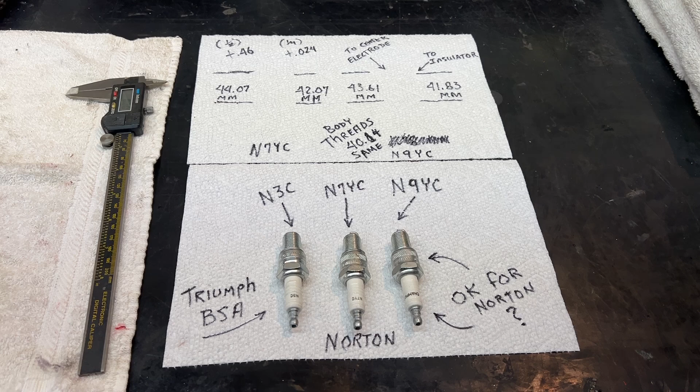Oh, let's have some fun with Frank.

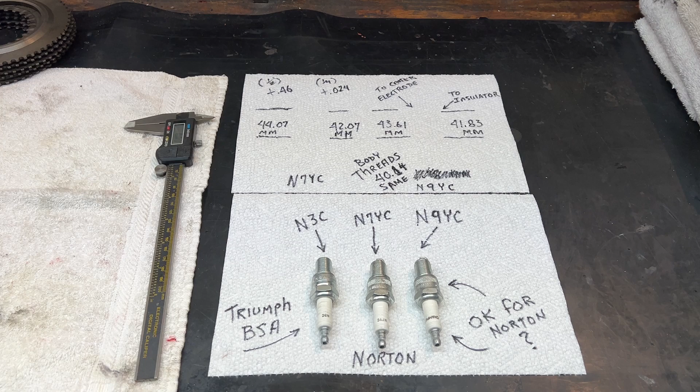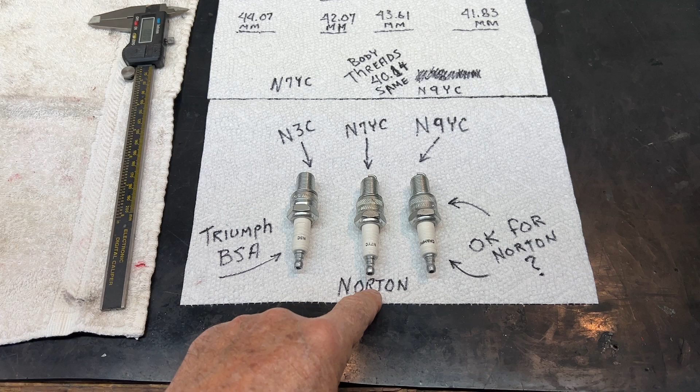I recently replenished my supply of spark plugs. Found a site online that had 16 available N3Cs, which I use for Triumphs and BSAs. And I bought 16 N7YCs, which I use for Nortons. But they supplied 16 N9YCs. I'm going to contact them and say, was this a mistake or was this your closest substitute, and then see what they say, whether I should return them or buy these.

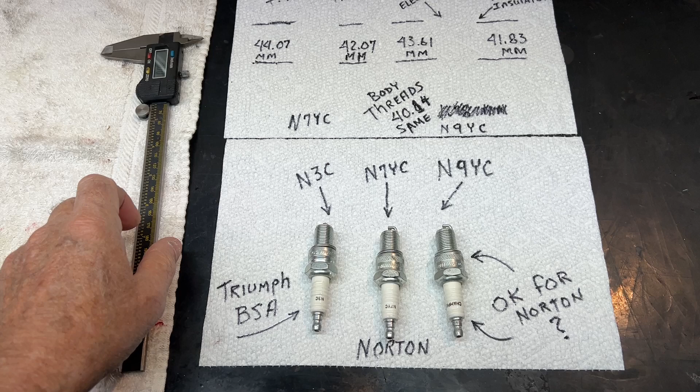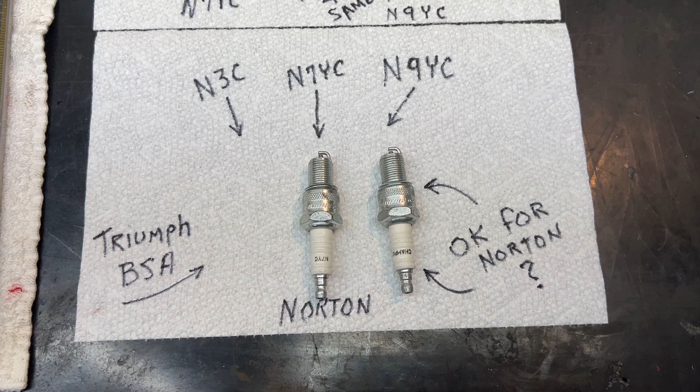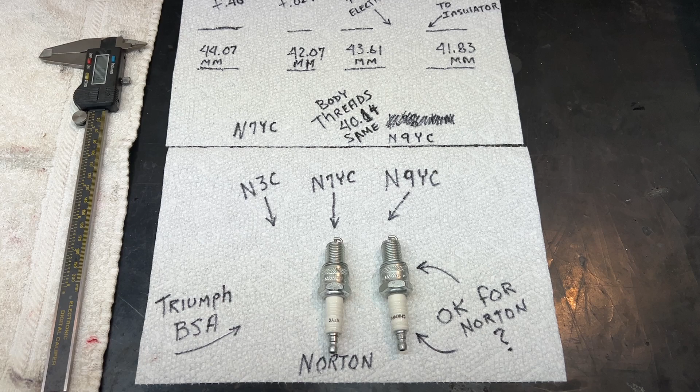In the meantime, I just wanted to see the difference between the 7YC and the 9YC. I'm going to take this out of the equation, we're not going to fool with that. But when you take these two and ask, can I use a 9YC in a Norton, or should I stay with the N7YC Norton? The truth is, everybody watching this video is going to say you should stay with the N7YC because that's what it calls for. True, I agree, 100%.

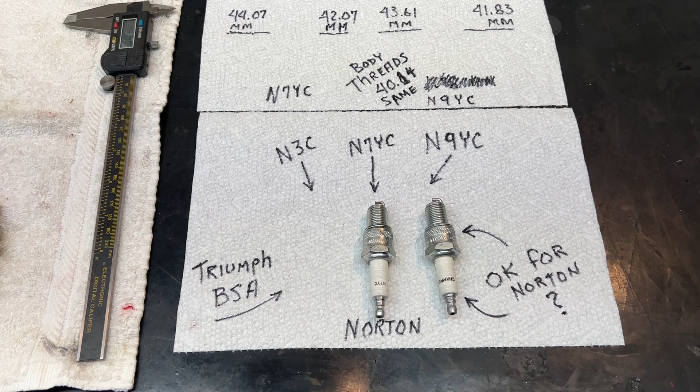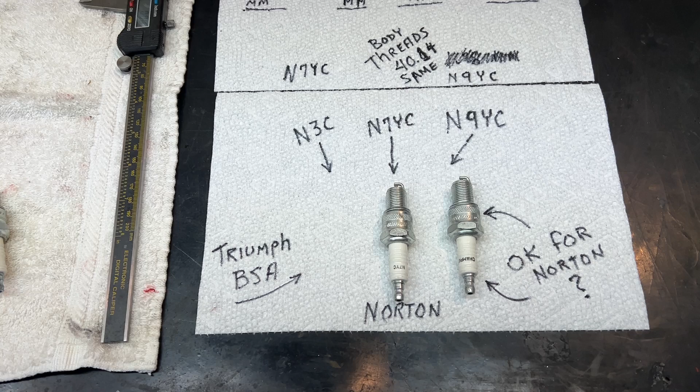I have also, in a pinch, run my Norton on an N3C and never seen any difference. I rode it pretty hard when I rode it. So I think you can safely sub in an N9YC. I'll bet you $1 it's not going to make a hair's breadth bit of difference. But once again, we're talking opinions, and opinions are interesting.

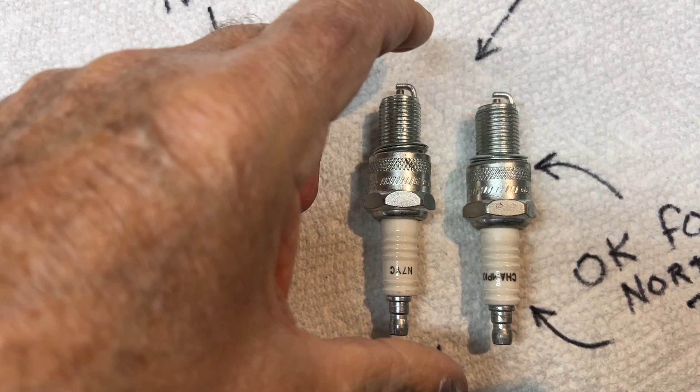So here, let's go in here for a close-up of these two spark plugs side by side, and you'll see that the 7 sticks into the chamber a little farther than the 9 — a little bit farther on the insulator, a little bit farther on the electrode, center electrode. Now, by the way, the bodies are the same. Any differences you see is parallax. I measured the bodies, they're the same. So the difference is in the insulator and the center electrode.

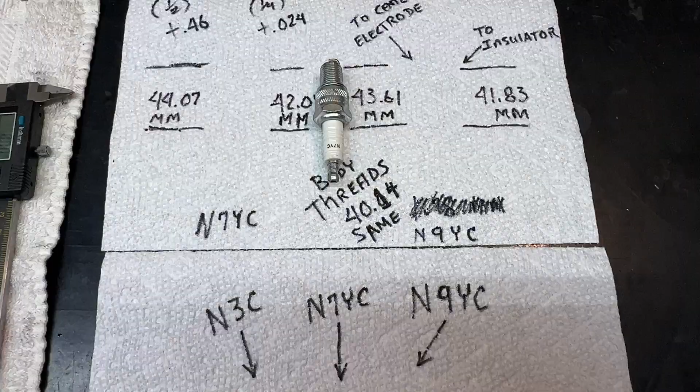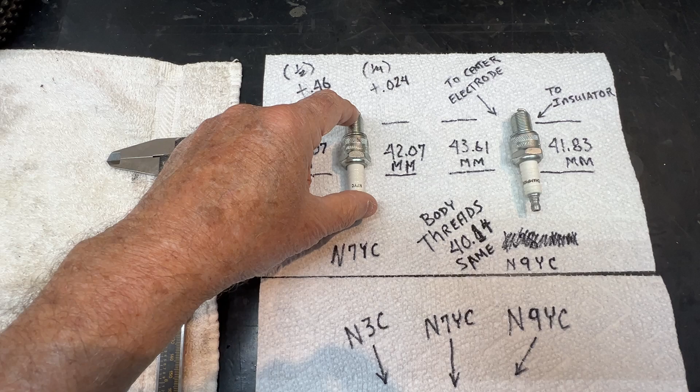Now let's just take this guy and put him up here. I'll zoom out a little. Out, Frank, out. And I'll take this guy and put him up here. These are some measurements I took. I was measuring from the bottom of the metal body to the center electrode and the insulator.

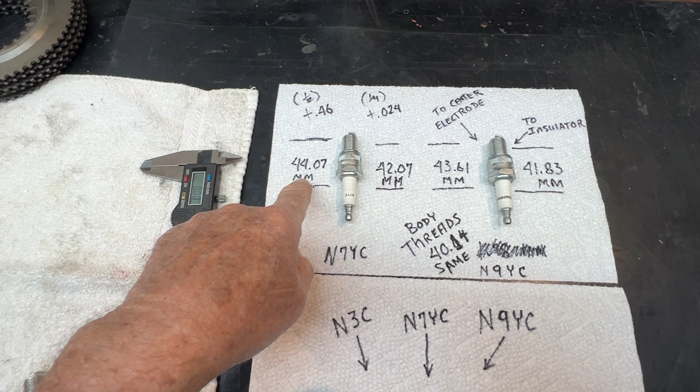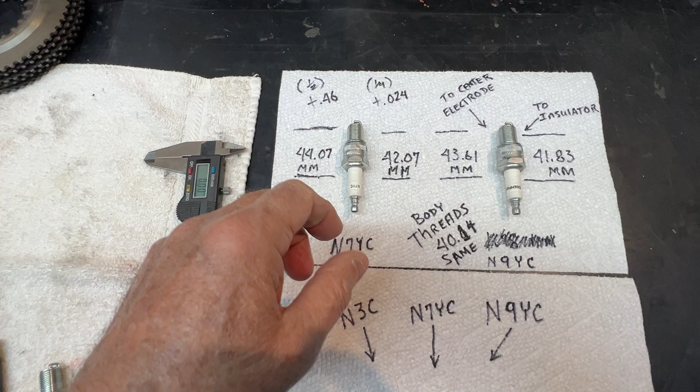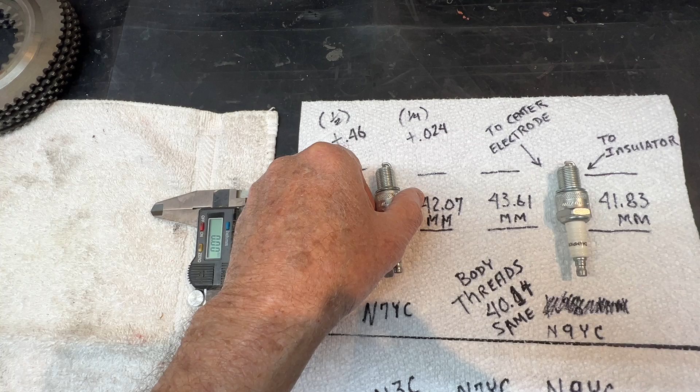For the 7, it was 4207 to the insulator, and 4407 to the tip of the electrode. On the 9, it was 4183 to the insulator and 4361 to the electrode. That's a slight difference. Subtracting these two gave me this one protruding into the combustion area by 1/2 millimeter, and the insulator protruding into the combustion area by 1/4 of a millimeter. So it's not a lot of difference, okay?

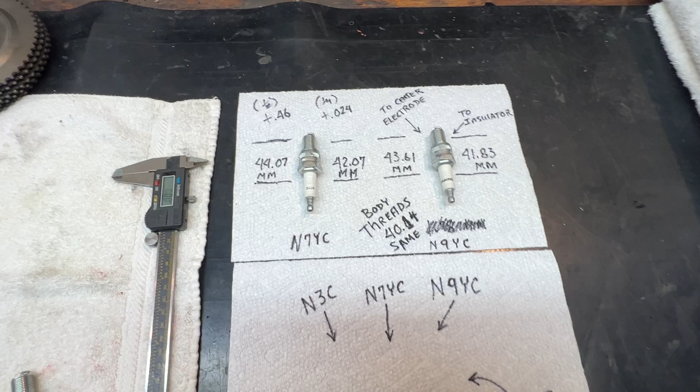And that brings us up to the concept of hot and cold. When I was searching the web, I couldn't find a nice chart, 50 down and 50 across, telling you all the specs and whether one is considered to be a hotter plug than the other being a colder plug.

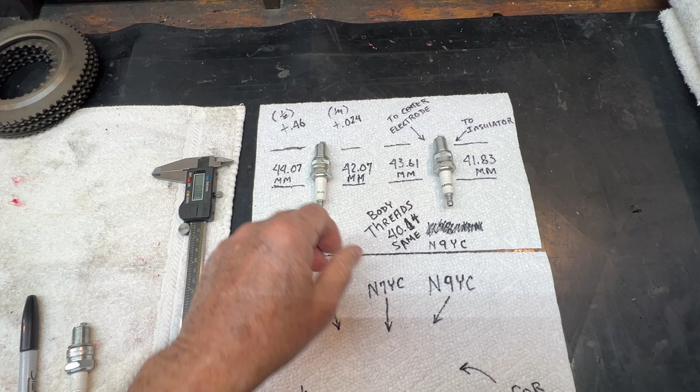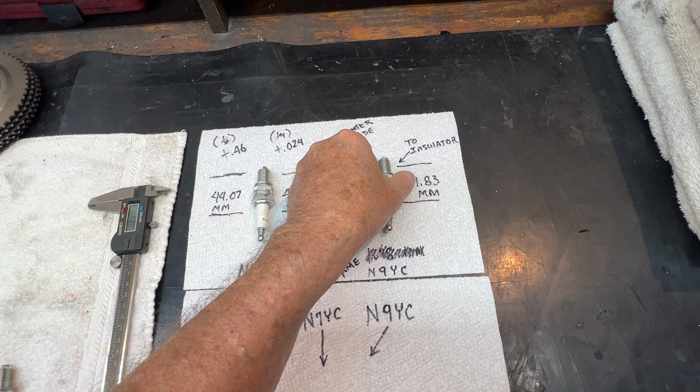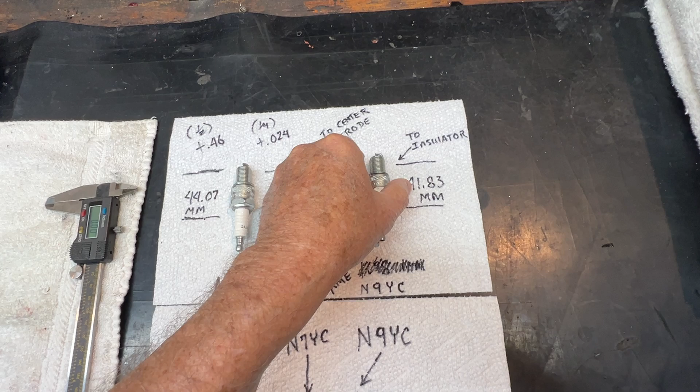There were explanations that say if the electrode and the insulator protrude farther down into the combustion chamber, they run hotter because they are inside the exploding flame. And then there are explanations that say if the insulator and the center electrode are safely shrouded down inside the metal, they will run hotter because they're not out in the nice cooling breeze that comes through every time the cylinder goes on to intake. So I've got a really good explanation for plugs running hotter for both, and equally good explanations for them both running cooler.

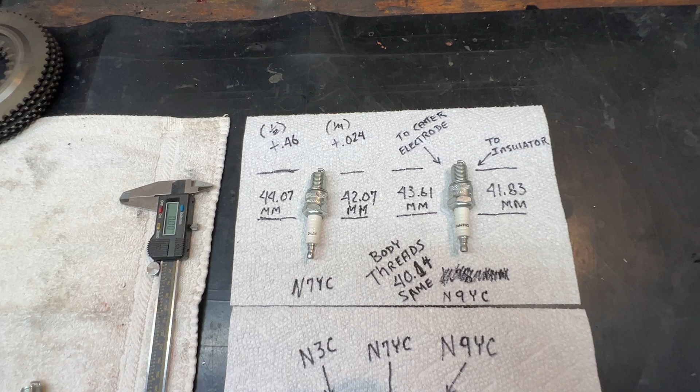Good explanations. I have no idea which one's true. And I expect I'm going to get at least 600 comments saying if it's farther, it's hotter, and another 600 saying that if it's farther, it's cooler. And I don't care. I really don't care.

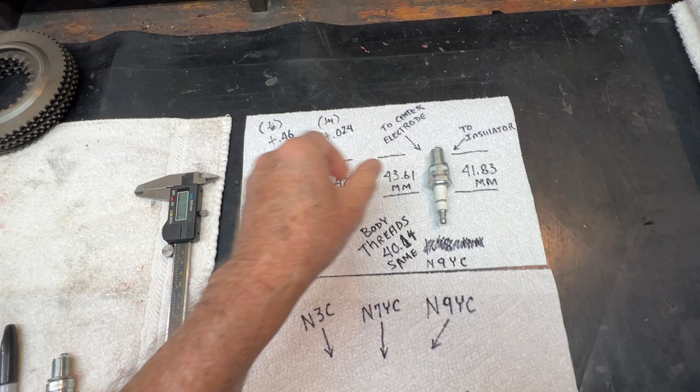I know that this 9 is going to work just fine in a Norton. Nobody will ever notice any difference until they take it out on a professional racetrack and run it at 125, 30 miles an hour. There might be a difference, I don't know. But when you're taking your bike to breakfast on Sunday, you're not going to notice. Okay, so that's where we are.

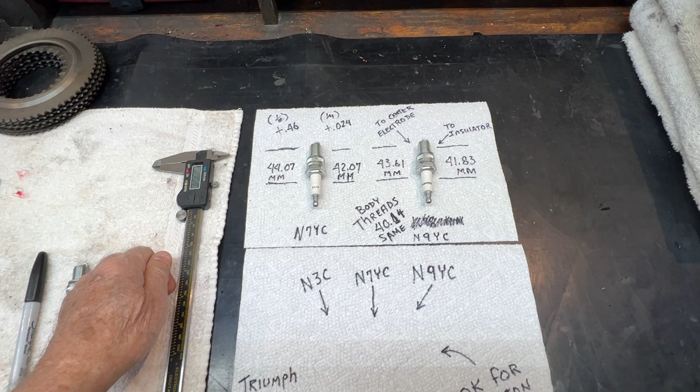Anybody want to express an opinion on whether the 9 will work in place of the 7? Feel free, please. Anybody who wants to express an opinion on whether the electrode going out into the combustion chamber farther runs hotter or colder, that'll be fun to keep a running score to see who says what.

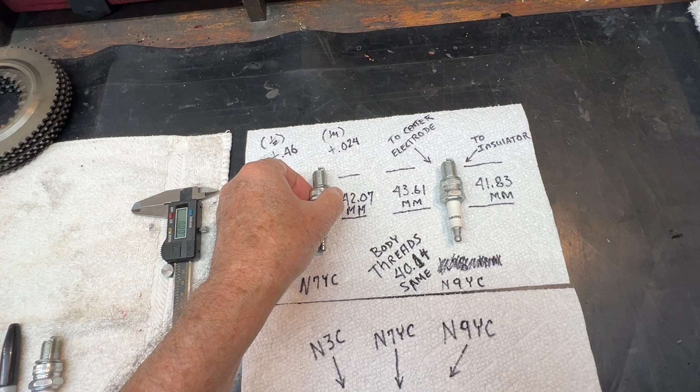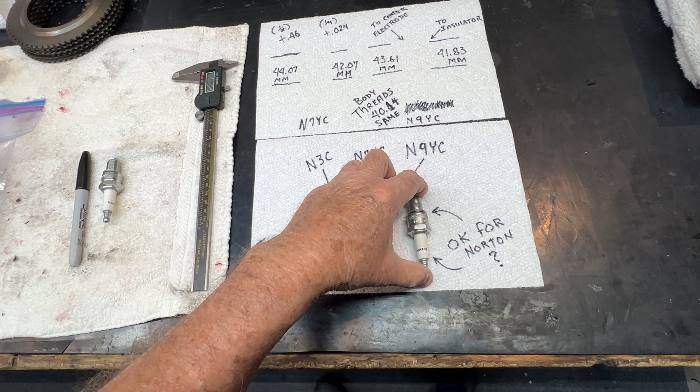And all of this is just fun. There's nothing earth-shattering here. I got 16 wrong plugs, which I'm going to contact the vendor and say, was that on purpose? Is this a suitable substitute, in their humble opinion, for the N7YC? Or not? So that's where we are.

Let me show you my drawer. Here are 16 brand new N3Cs for Triumphs and BSAs, and up here are 16 brand new N9YCs. So that's where we are.

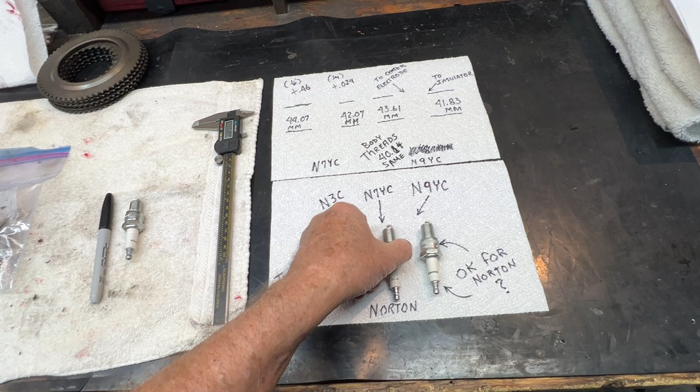Just having fun. Don't want to start a controversy or anything, but I just found this fascinating. I've never taken the time to measure electrode depth, length.

The outer electrode is common, that's no different. You set the gap by bending that, or as we used to say in the computer industry, we would form that tab. We never bent anything, we always formed things.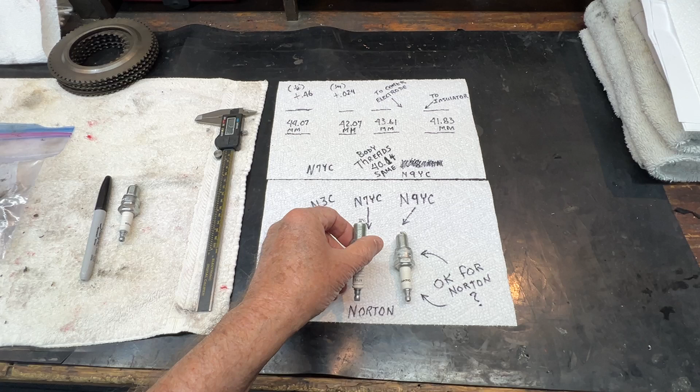And personally, I think the N9s will be just fine. I will make that decision once I talk to the vendor and see what they have to say.

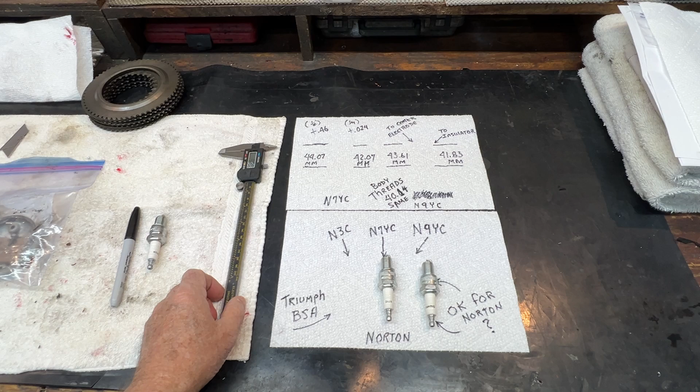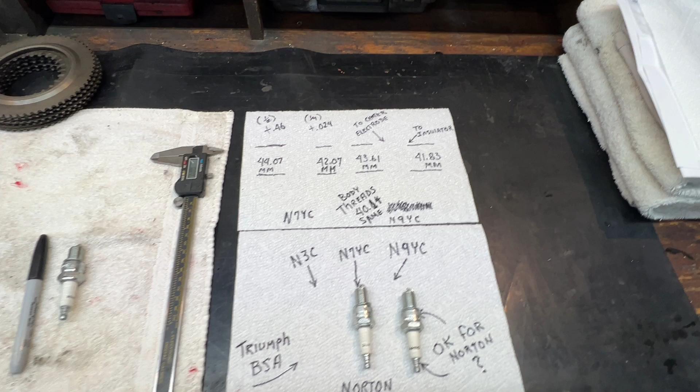So fun with Dick and Jane. Actually, this is fun with Frank. Take a look at this stuff. Anybody want to play with the numbers and come up with opinions? No problem, love to hear from you. Thank you, bye.